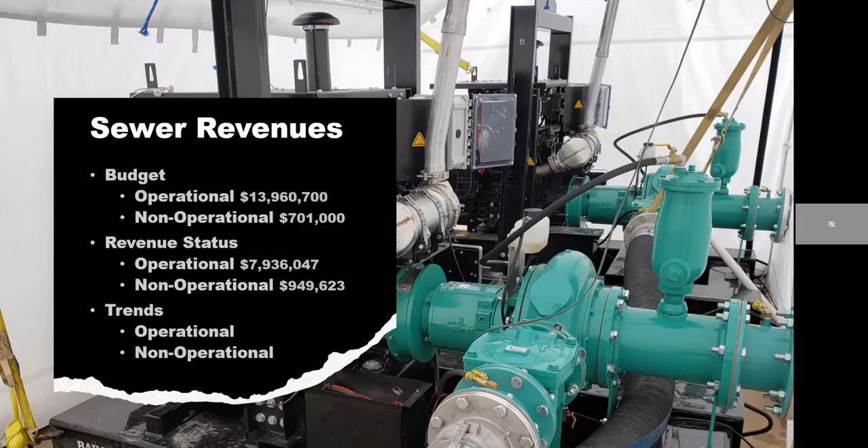And I did it again, jumped forward to sewer without discussing water's non-operational revenue. My apologies. The non-operational trends for the water side reflect that we've only spent 17% of our non-operational budget. However, many of the projects that are budgeted are already underway, meaning these funds are obligated. One area of concern for the board is the ability to maintain the expected water rehabilitation schedule, which is impactful to our overall system because getting behind could lead to costly repairs in the future due to aging infrastructure, reduced revenues, and increased expenses.

System development fees are basically used to support current and future development in Cheyenne for only growth-related cost.

Can be used for new water supply pipelines, water sources, and treatment capacity. It is a one-time charge that everybody pays once up front, and I would kind of look at it as your buy-in to the system. If you imagine all the infrastructure mentioned this morning, our stage 1 and stage 2 treatment facilities, dams, reservoirs, everything in our system that enables us to get water to Cheyenne, that is the infrastructure these fees are based upon, along with any anticipated improvements we're considering in the next 5 years. That's how we develop those fees. It's a one-time fee charged to everybody up front when they develop a piece of property, and it's basically an equitable share of growth for necessary new infrastructure that we spread amongst every user within the system.

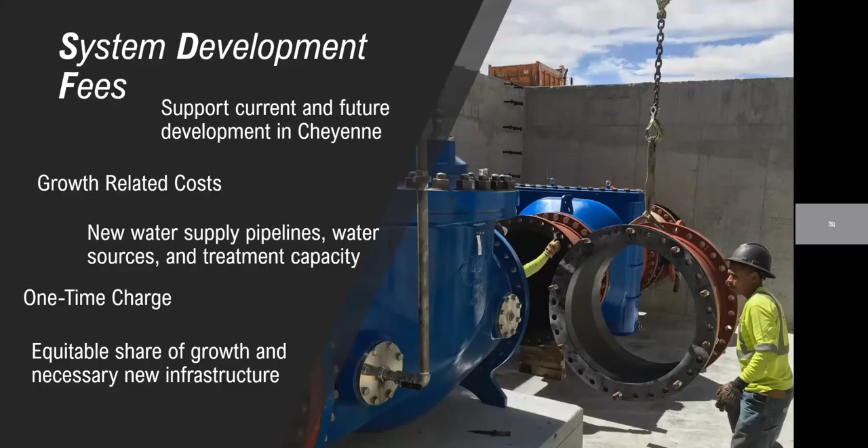Per city ordinance 4308, which is the current ordinance, or BOPU resolution number 20-20-05, you'll see it mentions this resolution approving the revised water and sewer connection fees, system development fees, pump station development fees, and related fees set by the Board of Public Utilities. It states that the board desires to set fees to secure income sufficient to pay for costs associated with water and sewer installations, recover costs and reduce debt associated with water and sewer development and expansions to the city's system, and pay for costs associated with oversizing water and sewer mains. So strictly, these system development fees are for enlargements or oversizing of our system, which will improve our system and enable us to meet the requirements of future growth.

There is also legal authority through state statute Title 15, Chapter 7, which specifically states that a one-time connection fee reasonably calculated to permit recovery of a proportionate share of the municipality's infrastructure costs necessary to treat and convey the water may be charged. So this is another area where the board is entitled per state statute to charge this fee. Those fees are typically calculated every 5 years when we do a rate analysis study, done by a professional firm that specifically does that for utilities in determining what those fee increases should be. Currently we are in the process of doing a rate study and probably going to make some changes to how we calculate some things here in the future, specifically system development fees. I'll get into that a little further in a couple more slides.

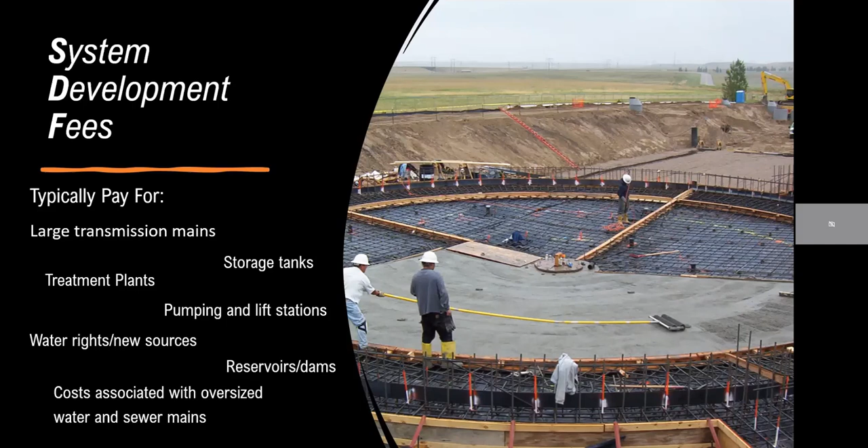Also reservoirs and dams, and costs associated with oversized water and sewer mains. Many times with developments within town, a development will come in needing a certain water or sewer pipe size, but because the Board of Public Utility knows there's going to be additional growth in that area, we will pay for upsizing - maybe a development needs an 8-inch, but we know that area ultimately needs a 12-inch in the future, so we pay for upsizing from 8 to 12. We do that through the bidding process and pay for that difference. That's what those upsizing costs are, and we can use our system development fees for those types of costs.

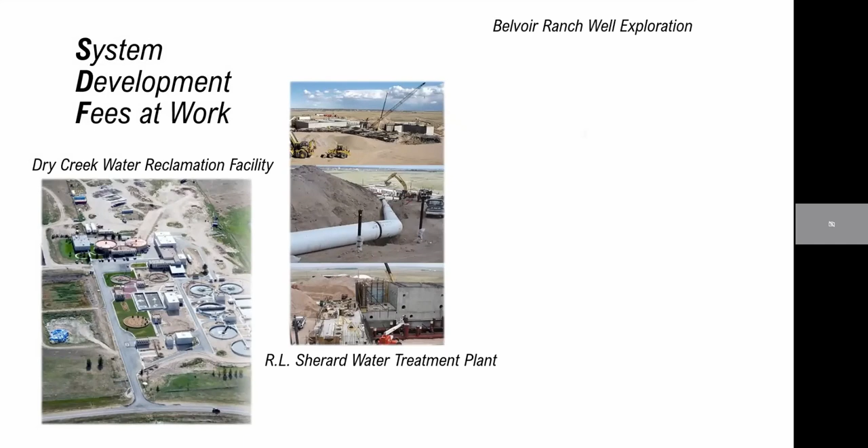Just some examples of system development fees at work, projects we've worked on in the past. The Dry Creek Water Reclamation Facility - we have two water reclamation facilities, our Crow Creek facility and our Dry Creek facility. That's a picture of our Dry Creek facility there, and we've done multiple expansions at that project site to continue to stay up with the growth of the city.

Next, you can also see the Sherard water treatment plant. It was built and completed in 2002. It's hard to believe that project is already 20 years old, but that is the state-of-the-art water treatment plant, and system development fees were used for a portion of that construction.

Also, you can see our recycled water pump station. For those of you not aware, we do have a recycled water system in town, which we call our purple pipe, as you can see in the picture. That system takes our treated wastewater effluent from our Crow Creek facility, treats it to an even higher tertiary level to provide Class A recycled water that meets DEQ requirements for the state.

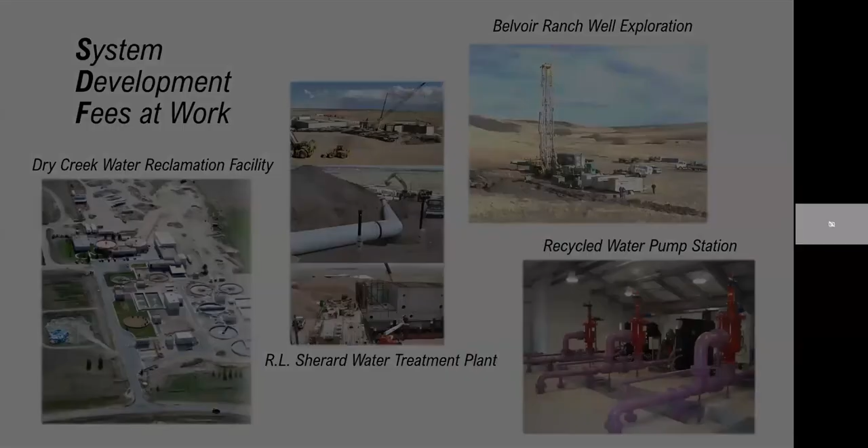One other thing before I go into system development fees - just roughly right now, so everybody knows, and these were in some of the numbers Ashley had gone over - we currently have approximately 6.9 million in system development fees on the water side and about 2.3 million on the sewer side.

I can tell you that prior to fiscal year 20, at the end of fiscal year 20, prior to depreciation, total capital assets for the water side are approximately $434 million. On the sewer side, that's about $164 million total capital assets prior to depreciation. So that tells you the dollar amount of infrastructure we have in the ground and operational.

That infrastructure is required to get our water to the city, treat it, distribute it out into the system, and collect our sewage, get it to our water reclamation plants, and get that water safely treated before it's discharged back into the creek. There's a lot of money invested in our infrastructure, so you can see that 6.9 million on the water and 2.3 million on the sewer are really a pretty minor drop in the bucket compared to the dollars we have invested in those facilities.

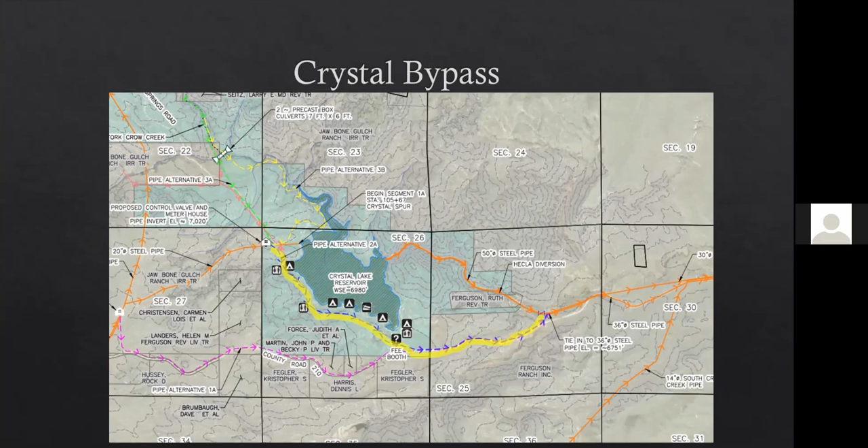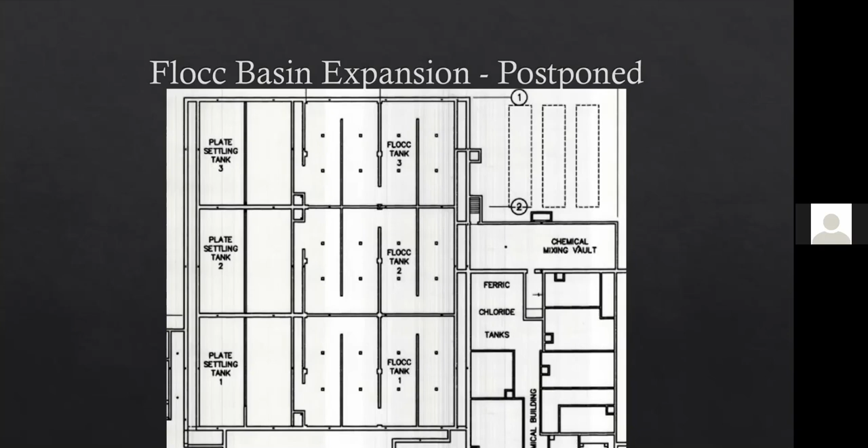One of the projects we postponed that was included in the master plan was an expansion to the flocc basins out at Sherard. Currently we have 3 flocc basins, and that's the limitation on how much water we can produce out of Sherard. Right now, with 3 flocc basins, we can produce 32 MGD. We're evaluating that, doing some analysis on how hard we can push the filters or the flocc basin. But at some point we're going to have to do an expansion to the flocc basin. But with the reduction in demands from Holly Frontier and the reduction of flows we've seen in the summer due to water conservation, this is a project we can postpone until it's needed.

But as Brad mentioned earlier, we do have a 20-year-old water treatment plant, which is hard for some of us to believe. So we've started to have to do rehabs at Sherard. These weren't necessarily all called out in the master plan, but we've had to do rehabs to the flocc basin. You can see here's a picture where we've recoated the walls and are rebuilding the paddles within there to create the flocculation needed.

Following that, we've had to start rehabbing our filters. Our filter bays, as I said, are 20 years old. We've had some issues on the under drains that you can see here that have required some maintenance, and then once again redoing the coating system on the concrete walls so that we can operate another 20 years.

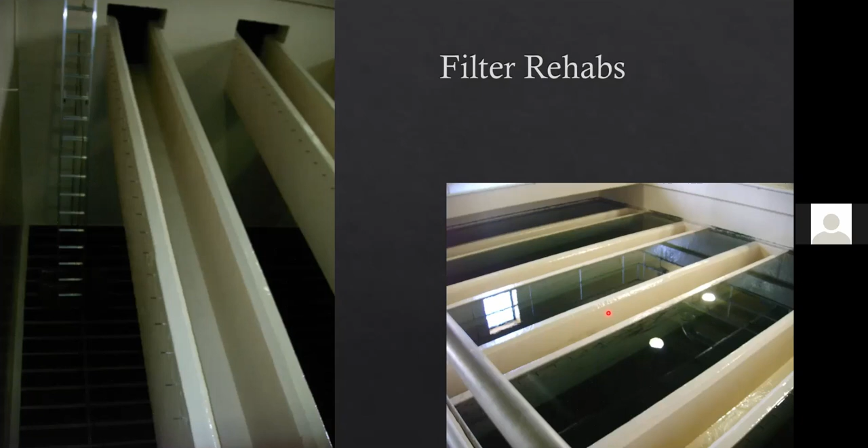One of the areas that we did have to do some reduction and postponements on is rehabs. This includes both the distribution system rehabs, the raw water system rehabs, and some of the well rehabs. This is just one area where we didn't have adequate funding to be able to do our typical goals and have had to cut back.

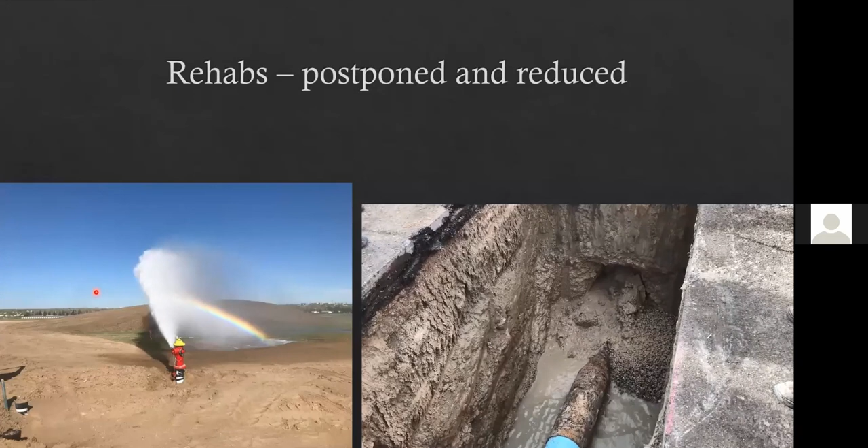Another area that we've had to postpone projects, and it's not necessarily due to cost, is in regards to our reuse system. The slide on the right shows the existing piping for our reuse system where we go up to North Park, up to the ball fields, so on and so forth. In the master plan, it was slated to get reuse water to Mylar and Smalley Park, and then up to Central McCormick area.

As part of that project, we'd have to increase the capacity of our high service pumps at Crow Creek. We've had to postpone this project simply because we no longer have the capacity. Holly Frontier, who has reduced their wastewater flow significantly, all that water went to our Crow Creek wastewater reclamation facility, and that's where we produce reuse water. With the loss of that water, we don't have an adequate supply to increase our demand on the reuse system.

So we're going to have to postpone this until two things happen. One, we have adequate flow at Crow Creek to produce the reuse water, and we have the demand for it.

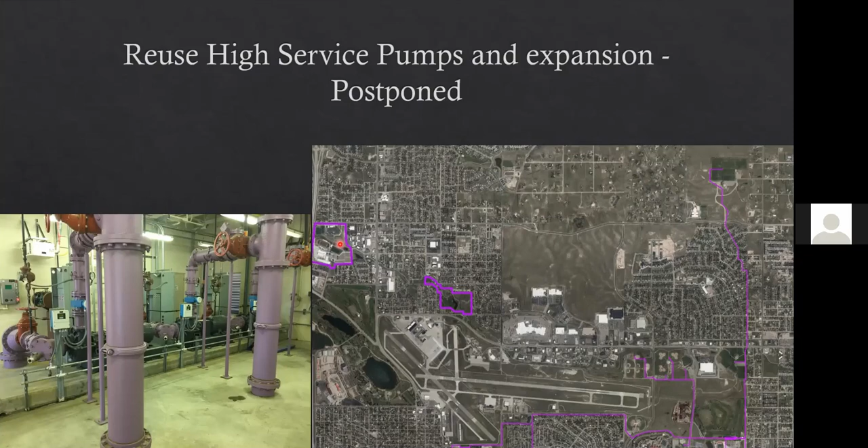A new item we've added to our list of projects is starting to set aside some money to help with future water rights. We've all talked about the drought, possible curtailment. We see that we need to do more to diversify our water right profile or portfolio so that we can address drought and curtailment in new and creative ways so that we can continue to meet the demand that our citizens and our customers put on the water system.

This project, currently out at Sherard, we do all our disinfection with chlorine gas, which has been a standard practice for many years. The issue with chlorine gas is it does have some safety issues and challenges associated with it. So we are hoping in the future, we've delayed this a little bit, to convert Sherard from chlorine gas disinfection to using sodium hypochlorite and generating that on site.

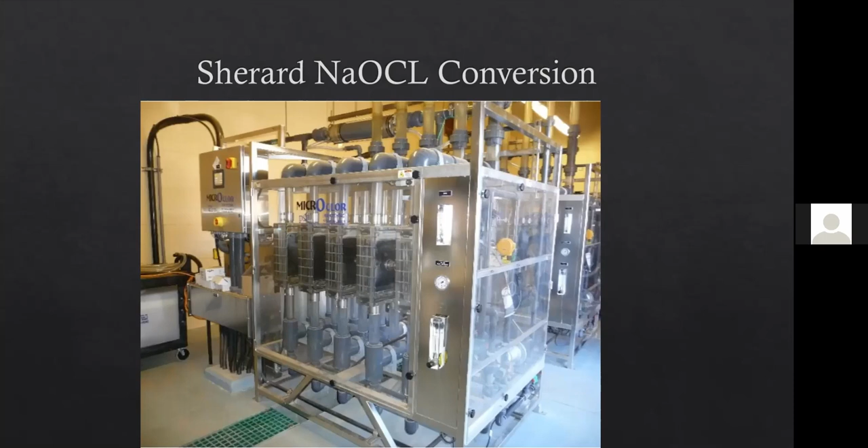So we did budget for the next coming year to do a study to see if we can convert Sherard to on-site chlorine generation, and if we can reuse the existing facilities at Swan Ranch and Round Top and move those to Sherard to minimize our costs. So there'll be more to come on this.

Another project that we have delayed that wasn't in our horizon was addressing the spillway at New North Crow. Currently, the primary spillway at New North Crow is undersized. Don't hold me on these numbers, but I believe it currently has a capacity of 200 CFS, and it needs to have a capacity of 2,000 CFS.

As part of the municipal storage project, it was identified that this does need to be replaced, but the study also identified that if we were to raise the dam at New North Crow, we could gain another 500 acre-feet of storage. That is very advantageous to be able to increase storage. So we're going to be working on that in future years, but currently we've had to delay it just to stay within our means.

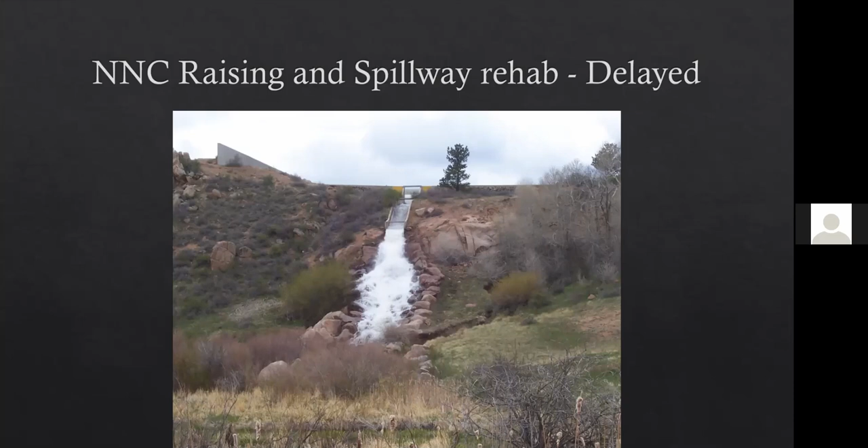Another project that's been eliminated that was identified in the master plan was to build a pipeline and booster station to allow us to get water from the federal well field, which is clear north of town, to Sherard. Currently, that well field can only flow to Round Top, and is the reason we have a chlorine generation system there at Round Top, to disinfect that water prior to it going into Round Top tank.

We were very fortunate that staff was able to identify that there was available head capacity in the federal well field and that the installation of a single valve would allow water to flow to Sherard. We have installed that valve. It has been successful. The last item that has to be addressed is...

The one downside to it is it does impact four of our existing wells. We're going to have to go in there and upsize the pumps and probably the VFD drives and motors to allow them to continue to function properly. But that's probably a cost of $160,000 as opposed to a $5 million pipeline and booster station. So this was a win for us in minimizing our costs.

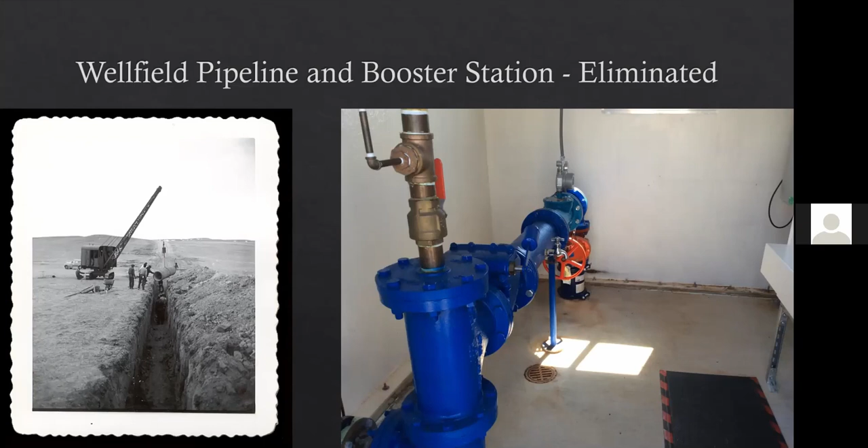Another item that we've delayed a few years is updating the master plan. We're currently trying to resolve our rate study, and with some of the workload we have now, we feel this would be more appropriate to attack in fiscal year 25. So it's one of those things we are trying to accommodate all the workload and allow us to properly handle this project.

Another area where we've been able to reduce cost because of staff efforts is at all of our facilities, we have an aging SCADA system in regards to the RTUs, the PLCs, and the radios that we use to communicate between all our facilities. Staff was able to identify a solution where we can build it ourselves using off-the-shelf components to greatly reduce the cost. We're talking in the realm of $1 million or so a year down to $250,000 a year. We'll talk about this more as part of the engineering group's presentation. That kind of summarizes some of the impacts on the water side and the projects we have reduced or eliminated.

On the wastewater side, once again, this represents all the projects we knew of, identified via the master plan or through staff identification because of problems that existed. You can see that it was a cost of $62.5 million. We did the same exercise we did on the water side, and we're able to reduce that down to $30 million. So once again, over a $30 million reduction.

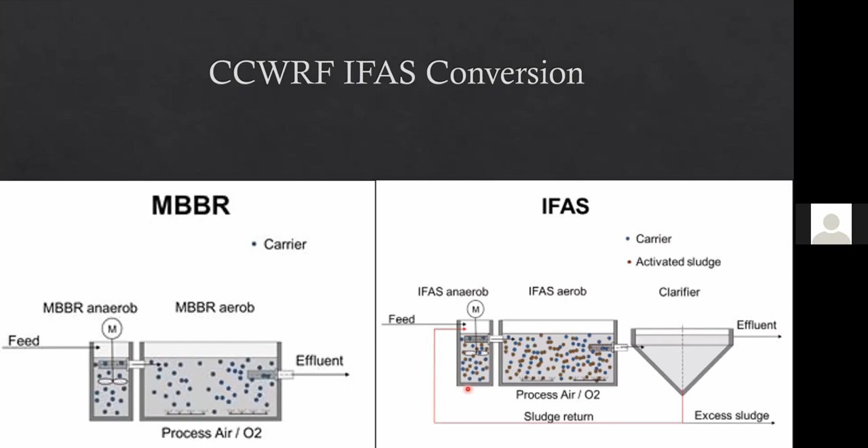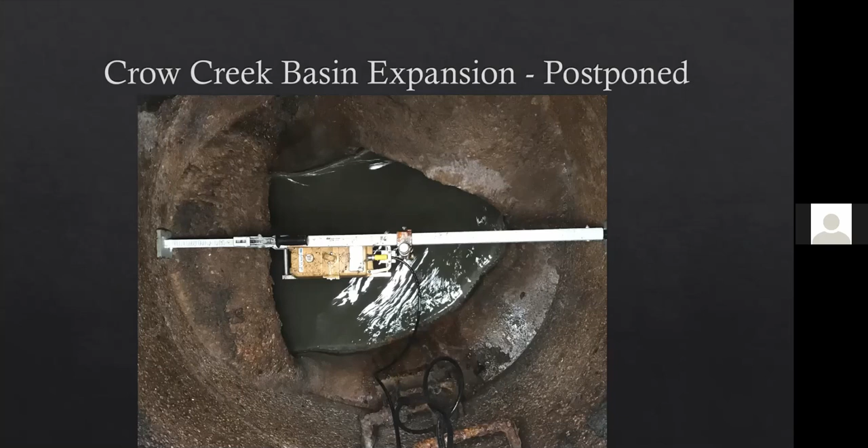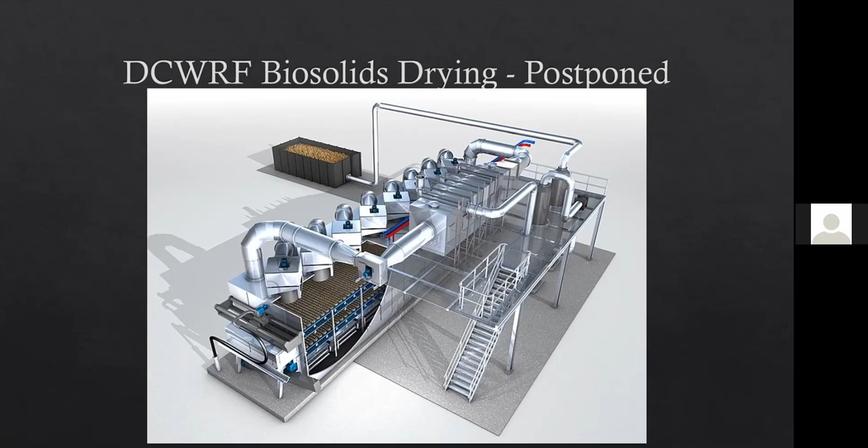Unfortunately, we did have to postpone some projects. One project we had to postpone was the Dry Creek Water Reclamation Facility biosolids drying facility. Right now, we have a project going on where we're replacing our existing centrifuges with screw presses to better dewater our sludge. This project will be needed in the future to allow us to continue to meet our Class A biosolids rating. Currently, we are allowed to do a 2-year drying cycle, which is not the norm, but there are concerns that regulations will come through that we won't be able to store biosolids on site that long, and we'll only be allowed 1 year to achieve the rating or the proper treatment. So this would allow us to get down to a single summer for biosolids treatment.

Another project still on the horizon is out at the Crow Creek Water Reclamation Facility: expanding the existing clarifiers, which I've kind of circled in green here. Currently, the existing clarifiers are not deep enough, and we have operational issues at times because of the depth and the reaction with sunlight and winter operations. So this is still on the horizon for us to do, and is needed.

I mistakenly forgot to add a questions slide at the end of this presentation. So I do believe I have one Q&A sitting out there. I haven't read it yet, but I will answer any questions anybody has.

I do have one question from Mayor Collins: would the projected new data centers be able to make up the difference from Holly Frontier, referring specifically to the recycled water program growth? Currently, no. The data centers do a good job of using water in the summertime, but most of that water evaporates away through their cooling process, so they are discharging into the Crow Creek Basin, but currently it's not enough to offset the 1 to 2 million gallons a day that Holly Frontier previously had discharged to the sewer system.

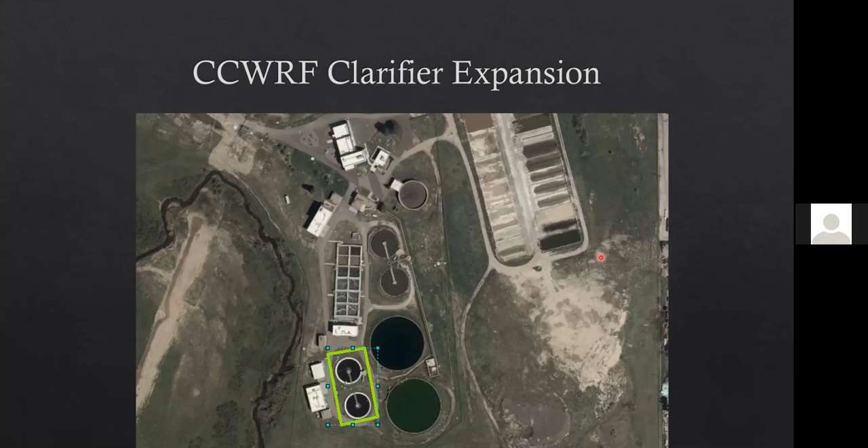Hello. We are going to take the time to have a brief update for each division, and we're starting today with administration.

Our first project and presentation will be done by Jason Land, Safety and Security, who will review our risk and resilience. Okay, sorry folks for the delay, we'll start this over, I guess we had a mic issue.

On October 23rd of 2018, America's Water Infrastructure Act was signed into law at the federal government. This law requires any utility with over 3,300 customers to develop and update their risk assessments and emergency response plans, and requires certain components of the utility system to be looked at and addressed in their assessments. To give some background, the Public Health, Security and Bioterrorism Preparedness Response Act of 2002 was the first time utilities were told at the federal level they need to create emergency response plans. This new act passed in 2018 just wants utilities to update, look at different assessments and risk, and update those ERPs. This will be on a 5-year cycle.

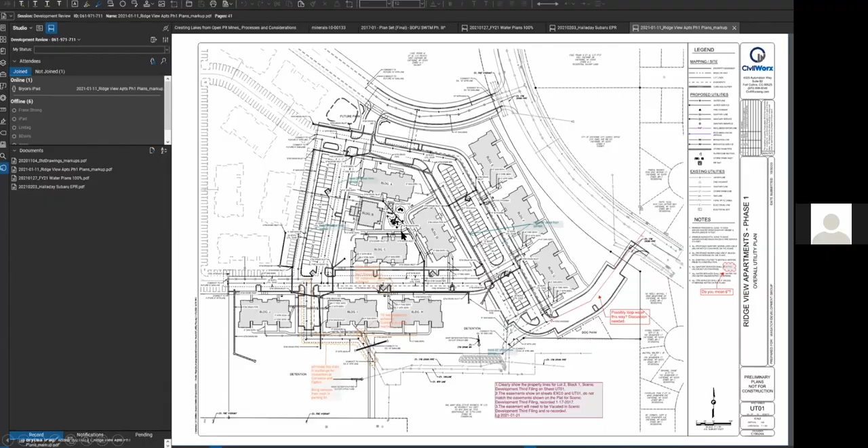In addition to that, we're meeting once a week to review these comments so that if there are contradictions or uncertainties, we're all getting on the same page before we submit the plan back to the city. The way we're doing that is by saving these files - you can see how we'd download it from review and make a comment. This is very well organized in terms of naming convention and different review numbers all in one spot. Then we take that file, and rather than writing it out in words, we just attach the PDF. It's much more streamlined on our end, on the city's end, as well as for the engineers reviewing those comments and trying to make sense of what we're asking them to do.

This would typically go to DEQ for permitting. We are currently working through a process called Delegated Authority, in which BOPU enters an agreement with DEQ, which essentially says that DEQ is giving BOPU the authority to issue construction permits for these projects. This is an effort to streamline the process. Essentially, it would go from an approved plan set to a pre-construction meeting, and then once all pre-construction issues are taken care of, BOPU would issue a permit directly, giving notice to proceed. This is something the development community has asked for many years, and it could save projects anywhere from 1 to 4 weeks. So that calls out our transition from legacy to current future process on the engineering plan review.

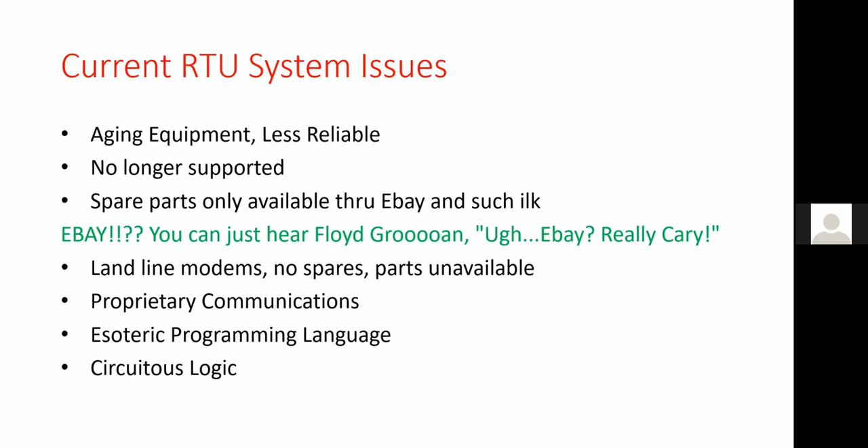But it also is a little bit hard to program. The logic is a little circuitous. We're going to come back to esoteric and circuitous here in a minute.

How do I get off that, Frank? Just take it to the left.

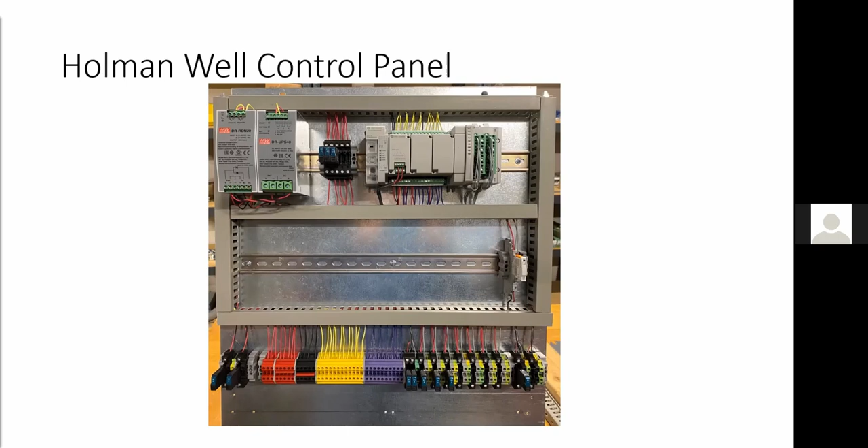So what we're looking at here, you've seen this picture before, is a panel that Dan built for us. It's a really clean looking panel. He's done a fantastic job building this first test panel. Up here on the upper right is the PLC. To the left are the power supplies. Down below are our terminal blocks. Really a great looking panel. He's doing a great job for us, and it's something that we built in-house.

So we chose to go with the PLC system that was a hybrid of both microwave radios and cellular routers, for various reasons. It's the least expensive overall system. It was non-proprietary, and we can install and program this unit in-house. It's also supported locally through CRUM.

As we've alluded to, ease of programming is key for us, and so is network security. Ironically, one of the negatives to this system is it uses PLCs. PLCs are commonplace since they're easy for us to program, but they're also easy to hack. So that's where our coordination with the IT group is going to be key.

Without the IT group helping secure this system, we would have a serious concern. But I think we're going to be able to resolve that without any big issues. The other negative to this system is that initial setup has proven to be a challenge—communication methods have to be resolved. James worked almost an entire day yesterday on the setup for the radio-based system.

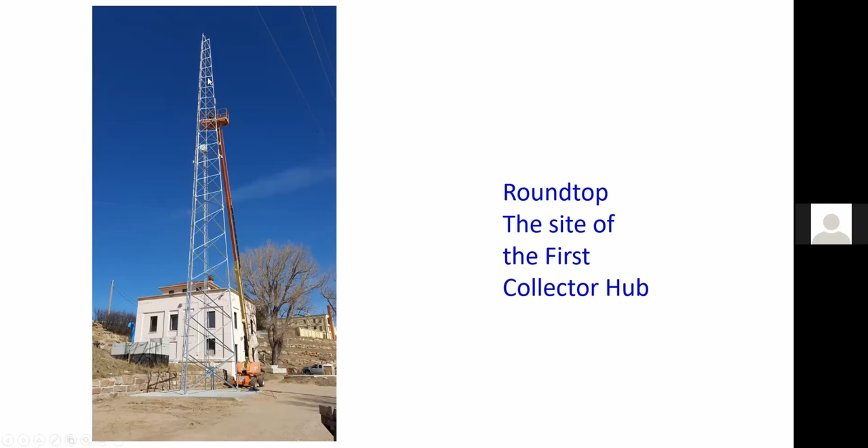So what we're looking at here is the Roundtop valve house, and we're going to make this the site of our first radio collector hub. It will talk to various wells, but it's the first of many, so this is just where we start. Yesterday, at the top of this tower, we installed the new radio system that's going to talk to Holman Well.

Other than potentially satellites. Well, satellites have an issue in that there's such latency in the communications that we can't use VPNs to talk to the normal satellite systems, and so we can't have a secure network. We haven't solved that yet, but we're hoping that with Starlink, the new satellite network that Elon Musk is deploying, we'll have reduced latency and potentially be able to use that system to communicate.

With Hog Park. Now, Lake Owen and Rob Roy, again a couple of mountain sites, still challenging, but we're hoping to use cellular at Lake Owen and potentially even at Rob Roy. We're also looking at running a fiber line up to Rob Roy through CenturyLink's network.

As we mentioned, this system is cellular based in certain sections, and there are issues between Verizon and our chosen provider working on the protocols. So that's another challenge we're working on. When we start talking about 80 some sites, it's going to take a lot of time to get these sites changed over to the new system. We're likely to use electricians to run conduits and wires, but hoping to install the vast majority in-house. Yet to be seen how that goes through the years.

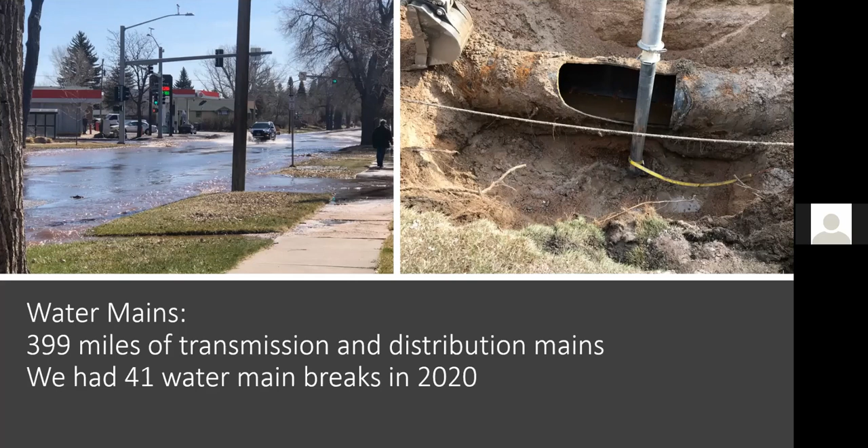This main break happened at the beginning of March, just after the COVID-19 pandemic hit. We didn't know much about this virus, but we did know there was no way to repair a 30-inch water main break and keep 6 feet of separation. Just really want to applaud the guys for all their hard work in getting that big repair done.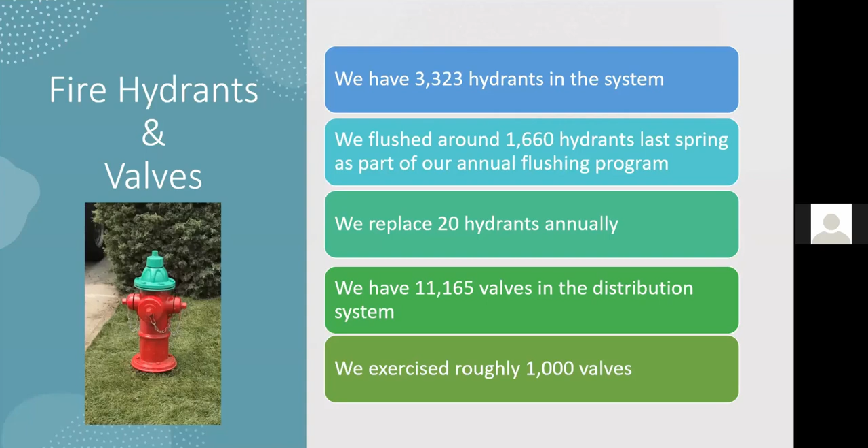Pressure reducing valves in our system are an integral part of maintaining acceptable pressures in pressure zones. Having a good maintenance program identifies any maintenance needs and helps to prevent failures.

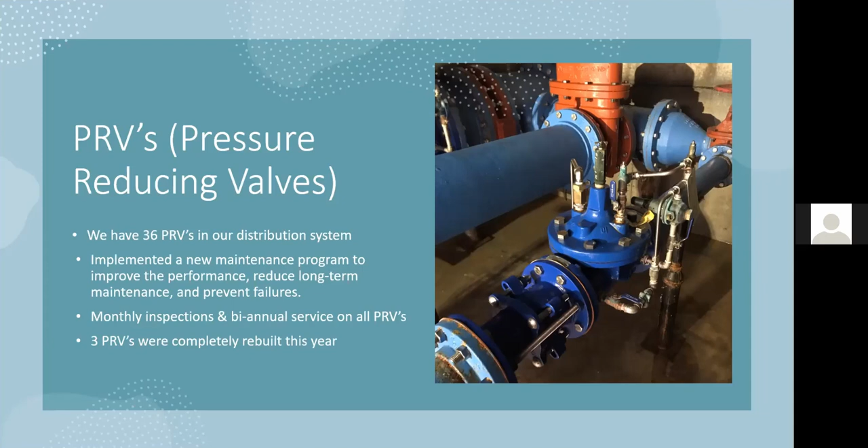Curb stops. We have 26,815 curb stops in the system. We repaired or replaced 84 curb stops and several service lines to go along with curb stop replacements.

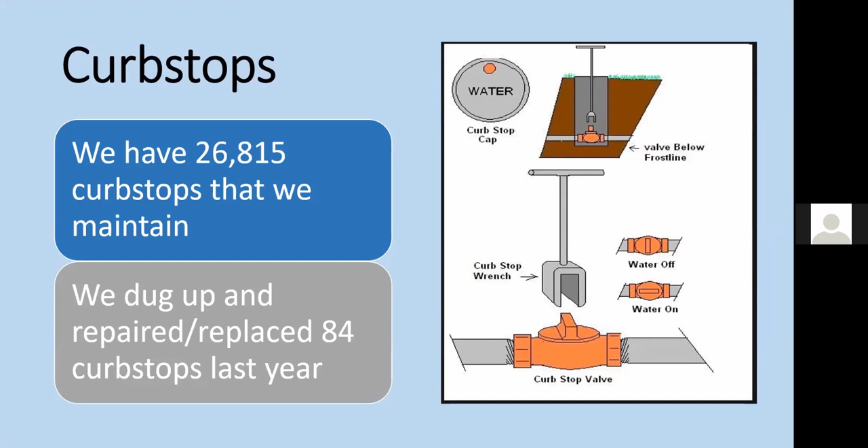Water tanks. This slide pretty much says it all. Now that the tanks have been cleaned and inspected, we have them on a 5-year cleaning cycle.

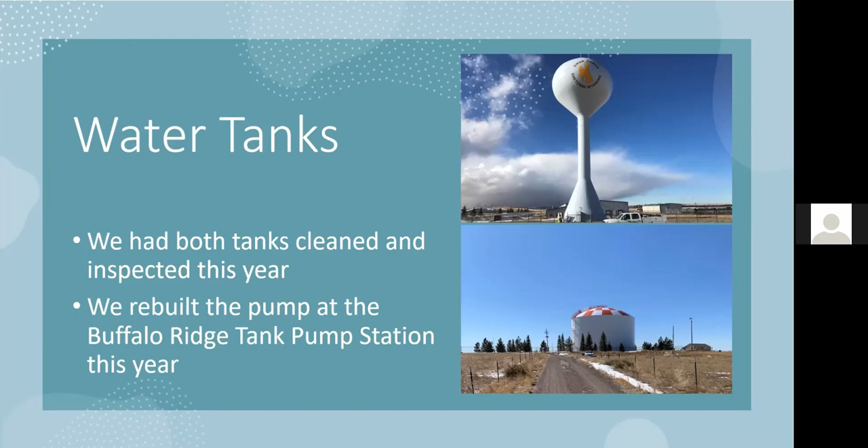Inventory for asset management. Jeff and Chris have done a great job developing this program. I can't thank them enough. They're always helpful and willing to make changes to help improve its functionality and ease of operation.

Employee development: COVID-19 really shut down everything we normally depend on for training and continuing education hours. This year we had to get creative. We relied on webinars and some in-house training to obtain enough hours to renew our licenses.

Our goals for next year are to continue focusing on inventorying all of our assets. This will help us determine maintenance and replacement cycles for everything in our system. We'd also like to develop an in-house leak detection program to help minimize water loss due to unknown leaks, and lastly, continue pursuing training and educational opportunities to keep improving ourselves and the distribution system.

That concludes my portion of this presentation. I'd like to turn it over to Dennis Graham now.

My group is the Support Services Group, and today I'd like to talk about the activities of the portion of that group that takes care of all the system's water meters. At last count, we have over 24,801 water meters in the system that we are responsible for installing, maintaining, and repairing on a regular basis.

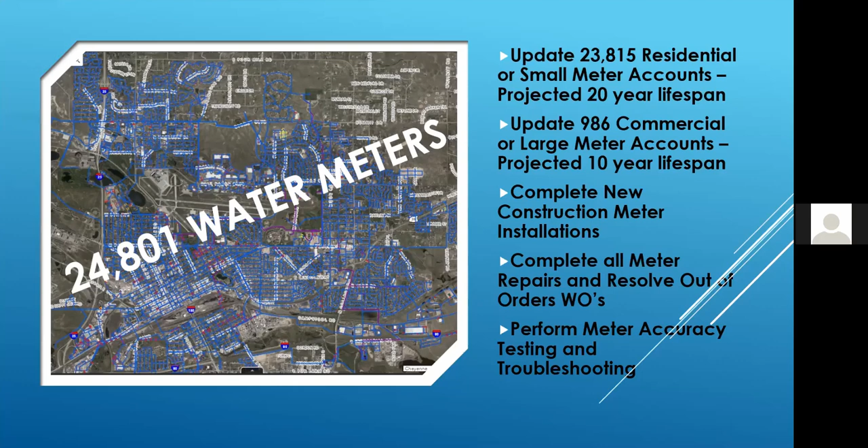We complete new construction meter installations, complete all meter repairs, resolve out of service or out of order work orders, and perform meter accuracy testing and troubleshooting.

Those meters range in size from 5/8 up to 12 inches in diameter and come in a variety of different styles. The smaller residential meters are T10 positive displacement meters. We have turbines and compound meters ranging from 1.5 inches up to 12 inch, as well as Fire Protectus compound meters, used to ensure fire flows should those be needed.

Recently I've introduced a new style of meter called a Krohne mag meter. It has no internal moving parts and is beneficial for places where we may have high total dissolved solids, such as measuring cooling tower outflows.

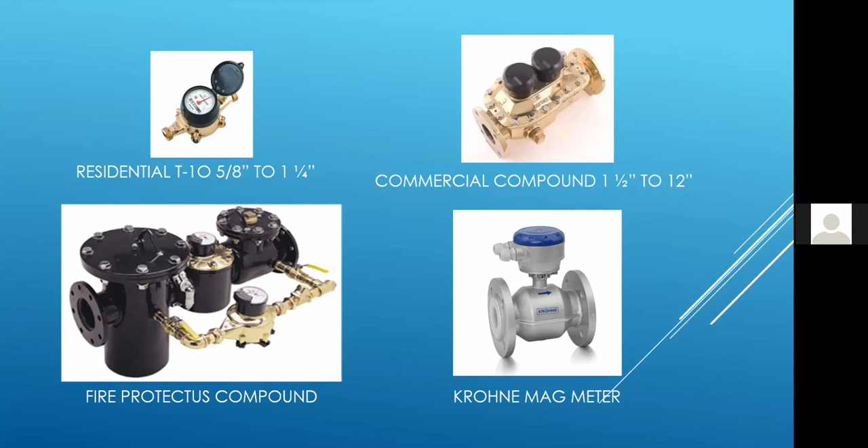To get the readings from those various meters, we've come a long way. Back when I started, about 15 years ago, we still had ARB boxes, where you'd flip up the cover and make a positive electrical connection with an Advantage meter probe. That migrated to touchpads, which used proximity digital transmission of information.

Today we are installing e-coder meters, which can buffer 90 days of information and transmit that through a radio signal, picked up with a Trimble Ranger handheld device. As Mark Mercer mentioned earlier, IT has installed 4 gateway collectors in the community, and those gateways are currently picking up over 14,000 reads on a regular basis.

The other nice thing about the software we use to read these meters is we get a lot of information. The screen I'm showing you now is something we use to monitor the performance of those meters and get notified of irregularities.

At the lower right-hand corner of the screen, you can see some minor reverse flow alarms. These alarms came more frequently than we expect, leading us to investigate the address. This happens to be a 4-plex apartment building, and when we investigated why they were having so many backflows, we realized they did not have a backflow prevention device. This led to contacting the property owner, and they're now moving toward installing backflow devices on each of their 4 buildings at that location.

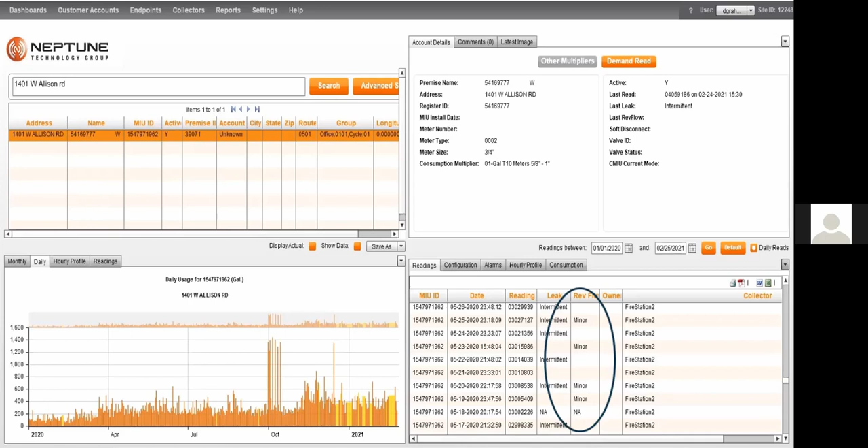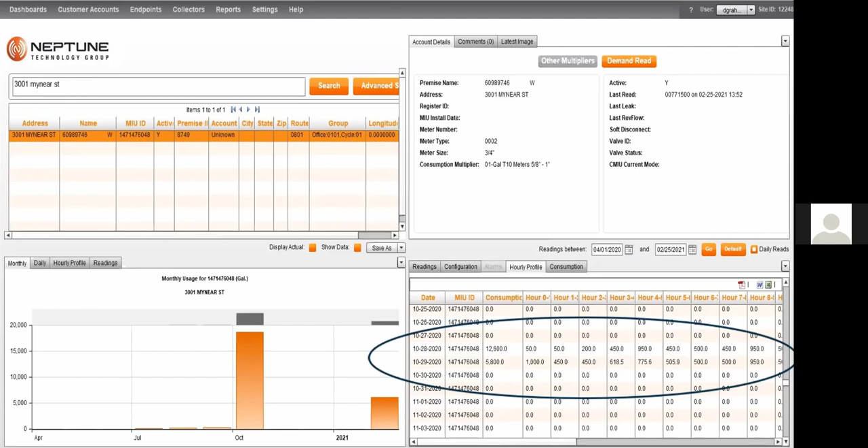The building had been winterized, but apparently they had a freeze and a break in a water line. This building was unoccupied, and by identifying the meter that was flowing, we were able to call the city and have the Parks and Rec team go out there and shut the water off. Good collaboration between all the crews to get that resolved. If this hadn't been found, who knows how long it could have run. In the day and a half that it ran, it went through about 18,000 gallons.

As I mentioned before, the 20-year lifespan on small meters comes from AWWA, it's a recommendation from them. Meters are designed to meet these lifespans, and the larger meters run 10 years. So we have to look at the meter replacement schedule to make sure our activities are aligned with that, and we don't let meters get too far out of date.

We built a spreadsheet that we can use to track that. The top line shows the year a meter was installed or last updated. The next two lines show the sizes or the count in the different sizes, either residential or commercial. And this next line shows us the year those meters need to be updated.

We at first were working to replace at least 1,000 meters a year, and we were pretty much keeping up with the schedule. But due to some of these new housing developments in town and the growth of the city, we realized that count was not going to allow us to keep up.

If you look at the graph down below, the blue bars are the number of meters that would need to be changed annually in order to keep ahead of our 20-year schedule. The orange lines represent what would be the balance of meters needing to be changed if we only did 1,000 meters. Part of the problem was the method we were doing this.

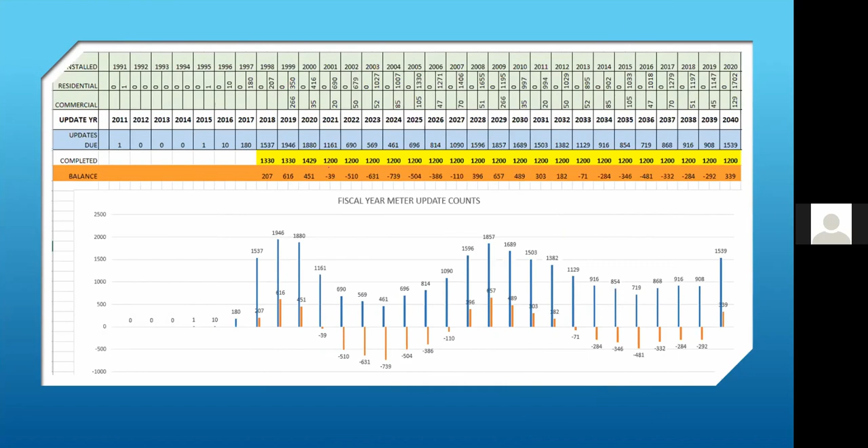Because of this, we've done a lot better. So instead of 1,000 meters a year, we've actually been able to increase that. You can see in 2018 we replaced over 1,300 meters, the same in 2019. In 2020 we installed over 1,400 meters, and this year we are on track to do even more.

Because of those changes, the graph shows we are keeping up with those changes instead of getting behind. This will allow other efficiencies—we can direct activities towards meter testing and ensuring accuracy in different ways.

So I'd like to turn this over to Chris Martinez now.

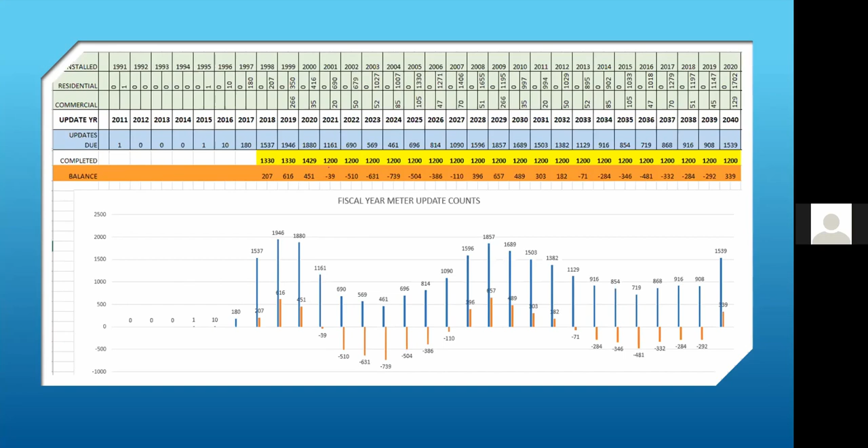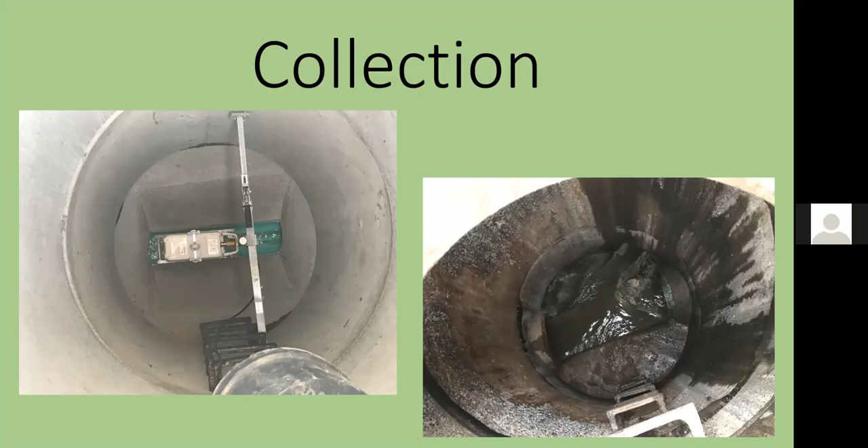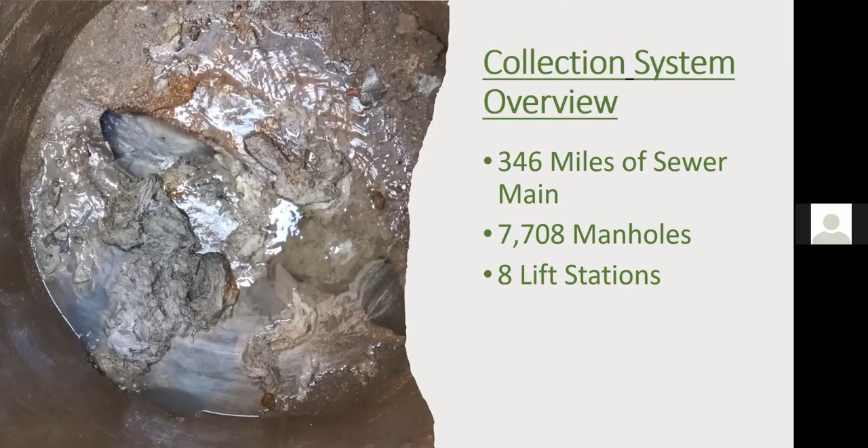Hello everybody, Chris Martinez. I'm here to give you an update on the collection system. Currently in Cheyenne, our collection system has 346 miles of sewer main, 7,708 manholes, and 8 lift stations that we have to maintain on a daily basis. Without these operators doing an amazing job daily, we would probably have more backups and more problems. So thank you guys for doing an awesome job.

As we all know, last year with COVID, due to the rules and restrictions, we had to change our ways of working. Based on the guidelines we were given, we came up with the COVID draft—we had a little fun with this. The COVID draft consists of a blind draw to create teams for a one-month time frame to keep social distancing and everybody apart from each other.

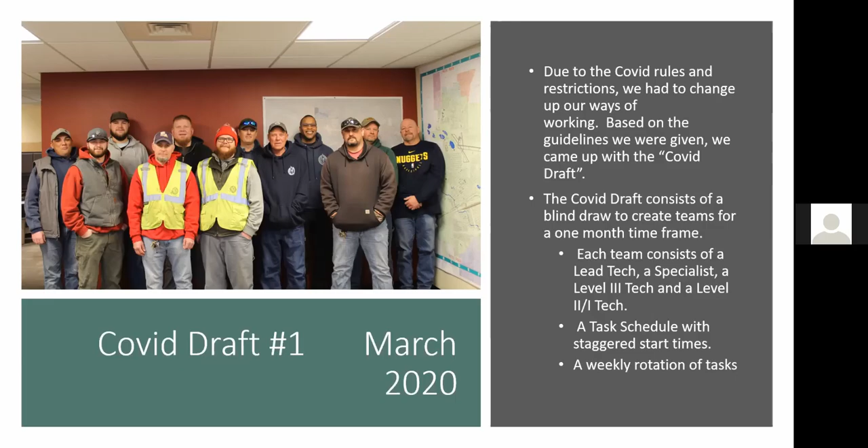Our teams, tasks, and schedules consist of a lead, a specialist, a tech 3, and a tech 2 or tech 1. Each team was an A, B, or C team, usually consisting of 4 guys, and we had 1 extra, so one team got a 5th. Our schedule was A team coming in at 6:30 to 2:30, B team from 7 to 3, and C from 7:30 to 3:30, to stagger those start times and not have everybody together at once.

Our tasks on A team are miscellaneous—that would be lift stations, videos, manhole caps, stuff like that. B team is construction, which is point repairs, manhole replacements, and those things. And C team was jetting, area cleaning, sewer calls, and stuff like that.

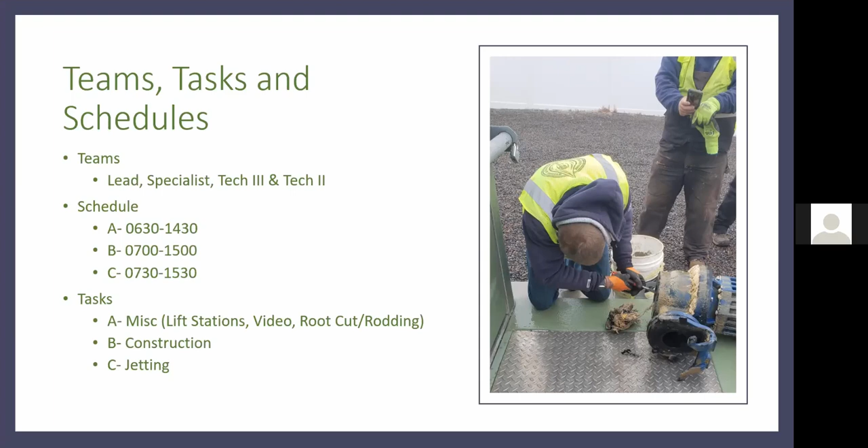Which actually worked out good for us, and we've done it for a year now. Results of this are: area cleaned 148 miles, jetted or preventive maintenance 7 miles, sewer calls 18.5 miles.

We videoed 12 miles, root cut 5 miles. We had a total of 15 blockages. 4 were found while area cleaning, 3 resulted from main breaks, 1 was a broken pipe, 3 were grease and wipes, and 4 were roots. One of the root issues resulted from roots growing from a homeowner's lateral and infiltrating our main, causing a backup.

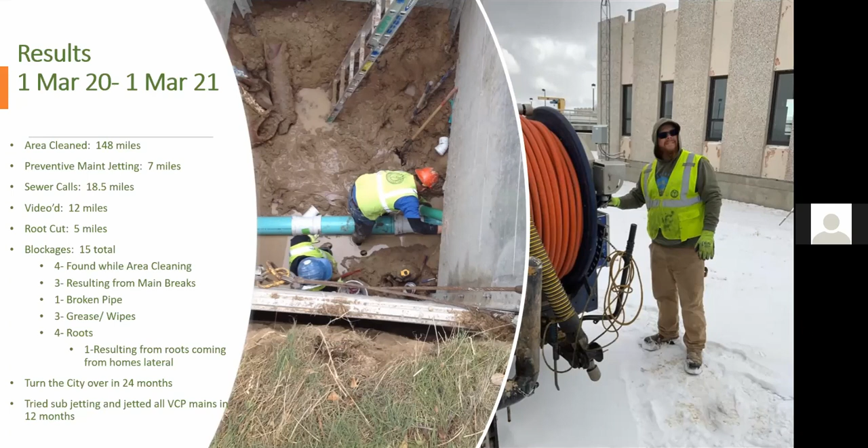We jetted all the VCP mains in 1 year, which is 148 miles of vitrified clay pipe, a little under half of the city. The guys did amazing on that. In addition, we replaced 19 manholes, excavated 30 point repairs, did numerous manhole caps and diamonds, and several internal pipe patch repairs. We continued inventorying and inspecting the systems, and of course did a couple of the Dry Creek WRF Hour projects.

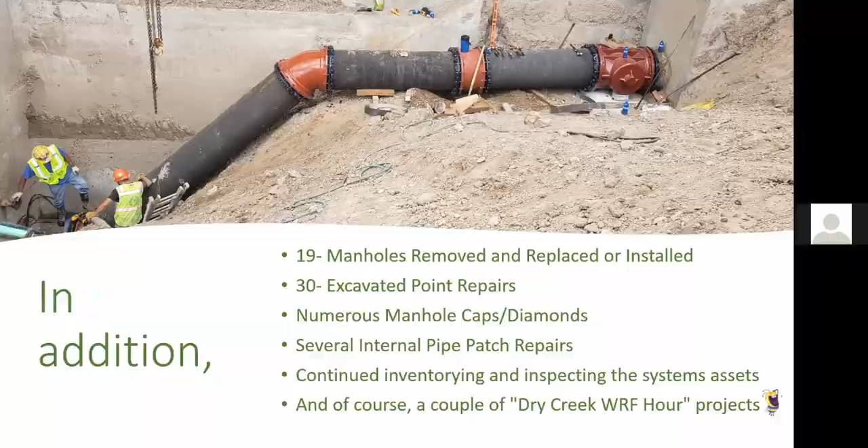The hidden positive outcomes of the whole COVID draft are: morale is up due to the frequency of the schedule change. Less experienced techs got more training and experience on equipment, lift stations, camera van, and inspection programs. Nobody got burned out.

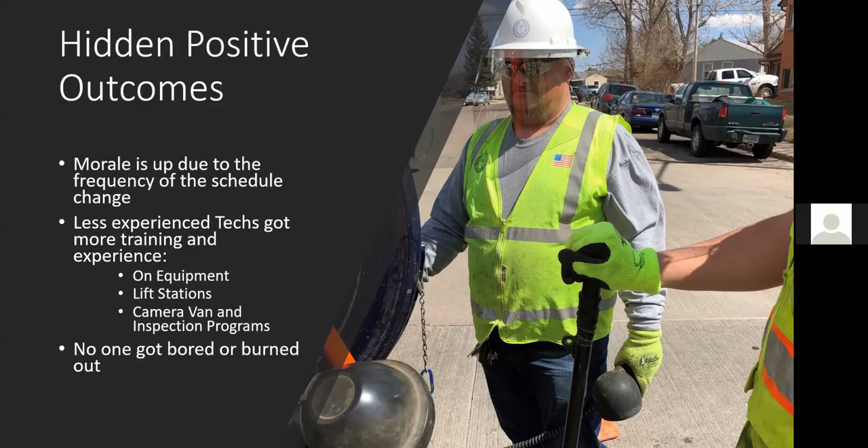Our goals we set are: continue to improve the asset management program, start a study on root abatement versus root cutting, experiment with drum cutters to cut out protruding laterals and fully open up mains, learn to train on our digital universal camera, increase our knowledge and understanding of our flow monitoring program, and continue training and educating the employees to enhance advancement.

And that does it for collection. I'll turn it back over to Doug.

Thanks, Chris. I just want to do a quick shout out and give some kudos to Chris. Harry Eberly, our supervisor for collection, had a family situation, and at the last minute Chris volunteered to step right in. So thank you, Chris, for doing that. At this time, we'll open it up for any questions anybody may have for O&M.

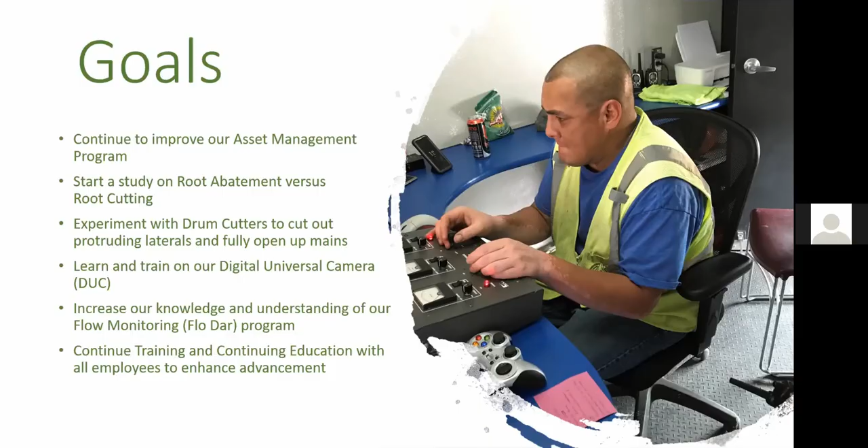I believe, as I mentioned earlier, we've got about 14 to 15,000. I'm sorry if anyone didn't see the question that was posed - it says, how many are left in the system to radio read? The gateways are picking up on 14 to 15,000, and that's based on propagation of the radio signal and weather conditions.

I know that IT is looking at installing another gateway. Don't know that a location has been identified yet, but the more this happens, the more we'll be able to pick up on these radio read meters. The ones that are left are being changed out at, starting from this year forward, at least 1,200 per year. So looks to me like that would be 4 to 5 years. We should have everything in the system radio read.

If not, we'll turn it over to the next group.

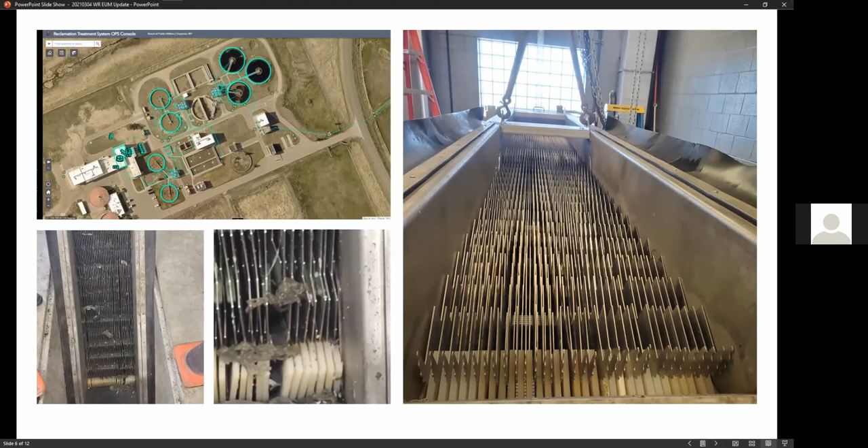Operational optimization. This was a big melting pot of all divisions, one being instrumentation. Once again, hats off to the instrumentation guys, Ray Gilmore. With the PLCs, a lot of our PLCs, what they call is noise. What that does is it affects the correction factor with meters, sensors. So Ray went in, especially with the primary digester, was able to get rid of some of that noise, fine-tune the upper and lower levels with the primary digester. That helps senior operators, junior operators know exactly what's happening if they didn't make any changes.

Another big one was Scada, the alert screen. That previous picture from the step screen at Crow Creek, we believe that was caused by clicking on a pump, switching it from lead to lag, and a huge, large debris came up through the wet well. What instrumentation was able to do was actually create alert screens that will notify operators, hey, you've turned on a pump, did you put the step screens in hand? That's not just going to save time and money, it's also going to gain knowledge again and just help everybody feel more comfortable, be a little bit more confident in the job that they do here.

Next one is laboratory.

Ever since I've been here, we've always done wet testing in-house. Here recently, in the last 3 months, Kent Loader, our lab supervisor, has reached out to a third-party contract lab where we found out that we can actually do wet testing for a little bit cheaper than what we could do in-house with wages and everything involved. This will allow Kent to do more cross-training for newer quality control analysts and share that institutional knowledge with everybody without being tied up with wet testing.

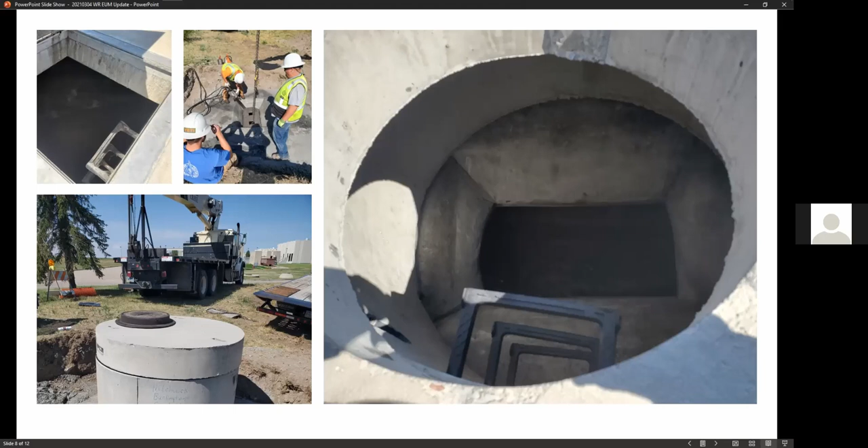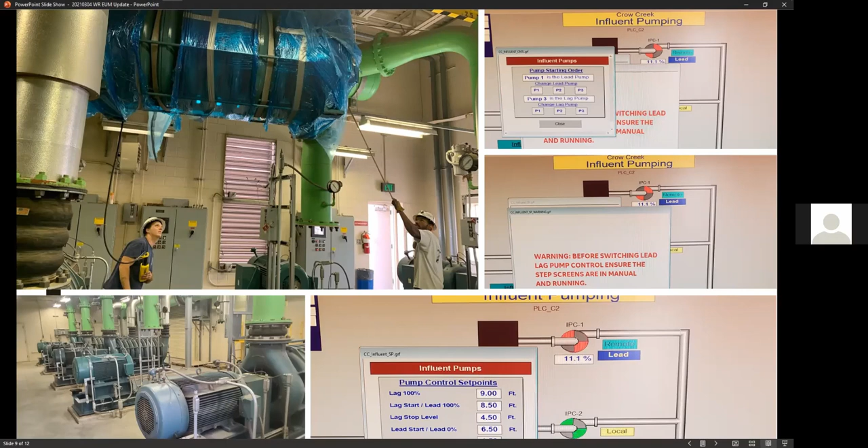Here's a picture of some blowers here at Dry Creek. This was last fall when we had 1 out of 5 blowers operating. This is blower 2 - Ryan Andrick on your left, Ryan Henderson on your right - actually placing blower number 2 in place so we can get that up and running. On the right side screen is the alert screen that Ray created. This is the IPS - if you switch an IPS pump, it gives you a whole bunch of warning screens, really making sure you're sure you want to kick that thing on before it actually kicks on. This is going to help people learn, grow, and save time and money on repair costs.

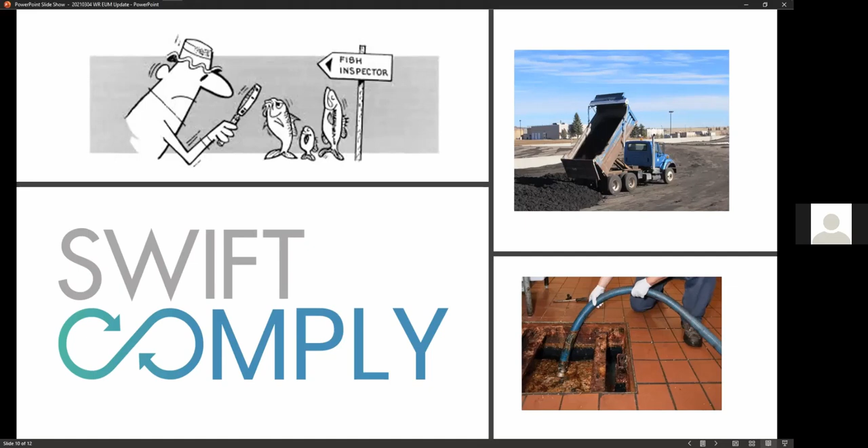Cool little cartoon that we use around here - the fish inspector, that's Mr. Kent Loader. This is for wet testing - he's looking at fathead minnows and water fleas when doing wet testing. We are outsourcing that now, but in years past that's what he's been doing. Swift Comply in the right corner is the biosolids, and the bottom right is the source control - that's the gentleman pumping out a grease interceptor at a restaurant.

So this is just the beginning. Some next moves - asset management. This is at the forefront of everything we do here, not just within O&M. We'll migrate that over to compliance, biosolids, and the laboratory as well.

File optimization - huge hat off to IT, Brian Cole, Mark Mercer, for getting SharePoint up and going. We're getting everything converted over, moving files and data to SharePoint. This will help us not only find sheets that are many years old, but finding drawings that used to take hours will now take just a few minutes.

One of our biggest goals this upcoming year, if we're allowed to with safety concerns and COVID-19, is to really get out to the public about what water reclamation is all about - what we do, what compliance is about, what source control is about, what biosolids is about. Just getting everybody informed. There's a stigma of 'you flush the toilet and it goes away.' We want to change that and make sure everybody's aware of what we do and the work that gets done out here.

Slow and steady growing pains - I can say, especially for myself, it is slow and steady. We've had a huge retirement these last couple of years. A lot of institutional knowledge went out the door at that time, but we're gaining that knowledge back and learning things that weren't known back in the day. So we're experiencing a little bit of growing pains, but as a division, as a family, we'll get through it.

Last but not least is ownership, especially with asset management and operational optimization. To Jeff and Chris's point, they're actually building the asset program for us, allowing us to do buy-in and customize it. To me, that's going to create ownership, and it'll benefit not just the division but the Board of Public Utilities as a whole for the future. It won't just be reactive maintenance or a reactive issue or emergency - it'll be a proactive response, which will benefit all organizations involved.

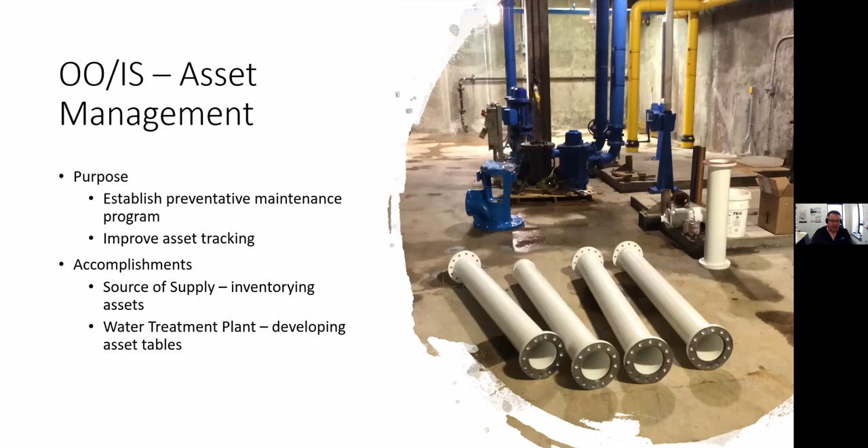One of the areas we've had some challenges this year is asset management and maintaining our equipment, shown here in this picture. These are our house pumps, which provide pressurized water to our facility and help us apply and add the chemicals we need to treat water. The picture here shows staff staging to replace one of those house pumps. As mentioned in other presentations today with engineering, our facility is now 20 years old, and we're starting to see equipment like the house pumps begin to fail. We do have good news, though.

We are starting construction on our hydroelectric generation facility this year. This will help us be more energy independent. It will also help us avoid some of the challenges our neighbors to the south experienced this year during those recent snowstorms. There are some additional things we're doing as part of our operational optimization.

As part of this, we are improving the ways we track electrical use. We're also changing over our lighting to LED lighting to reduce demand and improve the amount of energy we can sell back to the grid or utilize within our facility.

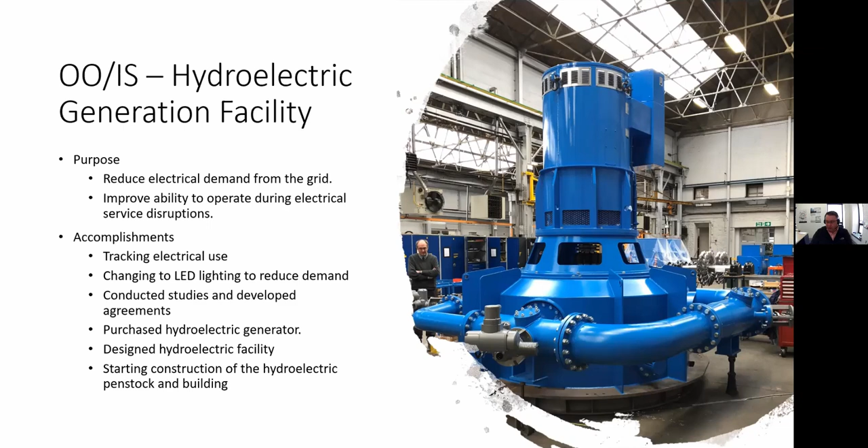We have had opportunities over this past year to replace positions, and when we do, we evaluate whether we can improve efficiencies. One approach is looking at opportunities for cross-training, trying to combine people with similar skills and combine efforts. To that effect, we have combined our source of supply and wells into one group. We've also combined Matt's team, water reclamation, and our team here in the laboratories into one group, and we are currently sharing an administrative assistant as well.

One of our big accomplishments this year is that we have worked to change our surface water groundwater blend. Since the mid-1990s, we have done a 75% surface water to 25% groundwater blend. That was done so that we added minerals and naturally adjusted our pH so the water was less likely to be corrosive in people's homes, and less likely to dissolve lead and copper from pipes. Since we constructed our treatment plant in 2002, we've added the ability to do some additional pH adjustment, so we no longer need that 75-25 blend.

So we conducted a study to see what we could accomplish while maintaining and protecting water quality for our customers. We have worked with EPA to accomplish that, and we are currently doing an 80-20 blend. If everything continues like we anticipate, and the study indicates it will, we'll be able to further reduce that next year to an 85-15 blend.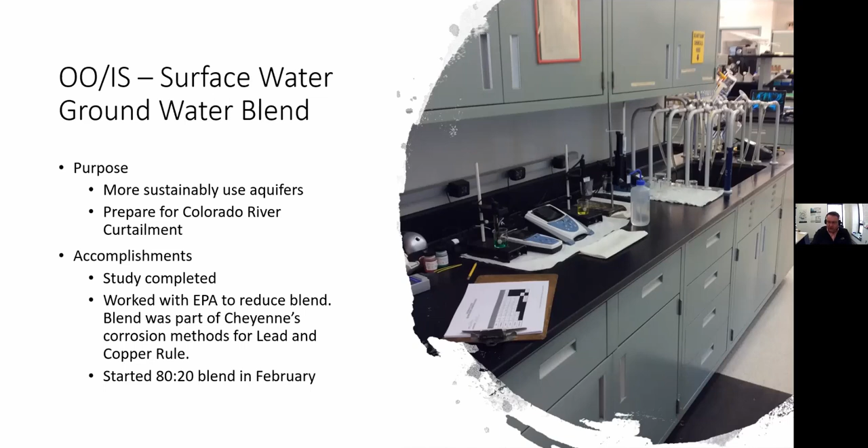As Frank indicated, we are looking at switching to a hypochlorite disinfection process out of the water treatment plant. The purpose behind that is that hypochlorite is much safer for our staff than chlorine gas. It also reduces the amount of pH adjustment that we would need in our water. Hypochlorite lowers the pH less than chlorine, so we would also need less sodium carbonate to better balance our pH.

We have gone out and obtained some cost estimates on what we think it would take to install a hypochlorite system. But in evaluating those cost estimates, we think we can repurpose some equipment at the plant and dramatically reduce those costs. So in this upcoming year, we're going to be working with an engineering team to design a hypochlorite system, incorporating some of the facilities that we already have.

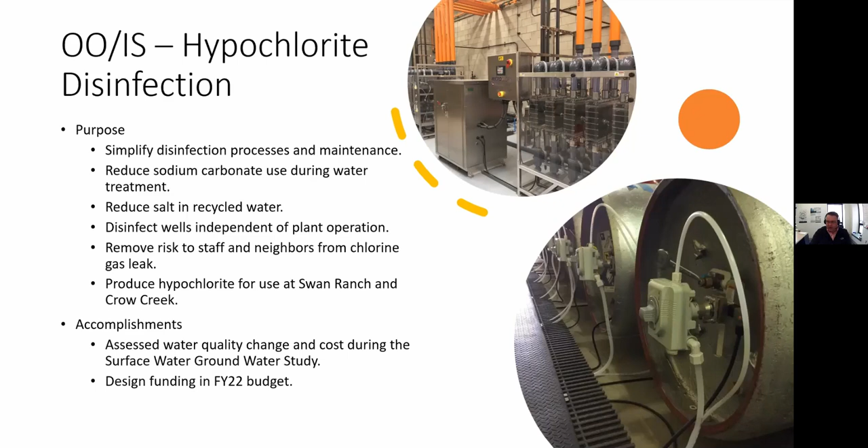As was also indicated by Frank earlier, we have been looking at potentially increasing our treatment plant capacity by re-rating our filters. So we've been looking at that through the past year as well.

We do want to understand our aquifers better. We want to know how we can sustainably use our aquifers, how we can improve groundwater recharge. We need to identify some future locations for additional wells, and possibly even look at using aquifer storage and recovery in the future. So to do this, we have conducted several studies.

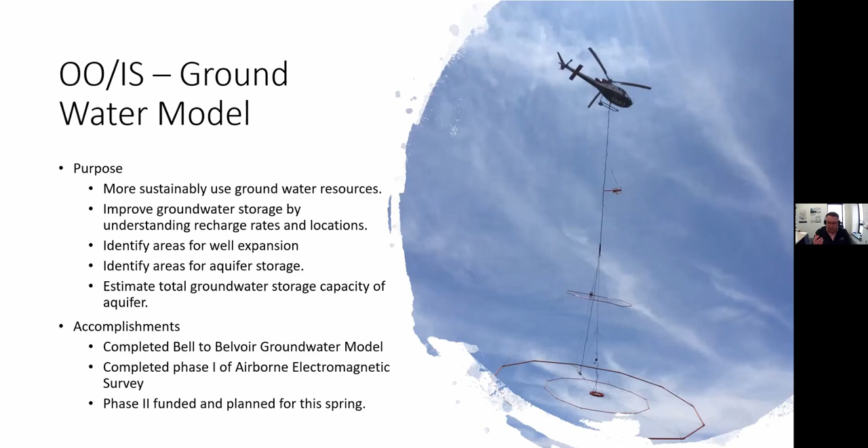We want to combine all of these studies together into a unified groundwater model. From this model, we hope to be able to identify where recharges occur in our aquifers and possibly even come up with some ways to enhance that aquifer recharge. A possible example might be installing snow fences above areas where the groundwater recharges, so we capture snow and improve the amount of water we're getting underground.

Another area we've been focused on this past year is our Pond 3. Pond 3 is the area where we store and separate the solids and material that we remove from our water to make the water safe to drink. Over time, this pond fills with sediment, and it costs about $500,000 every 3 years to remove those solids from that pond.

We're testing utilizing some textile bags to remove more of the water and dry those solids, making it easier to transport them to neighboring ranches, and possibly even utilize those solids with our biosolids as part of our biosolids program. We think that we can accomplish that and reduce our costs from $500,000 every 3 years to maybe around $70,000 a year.

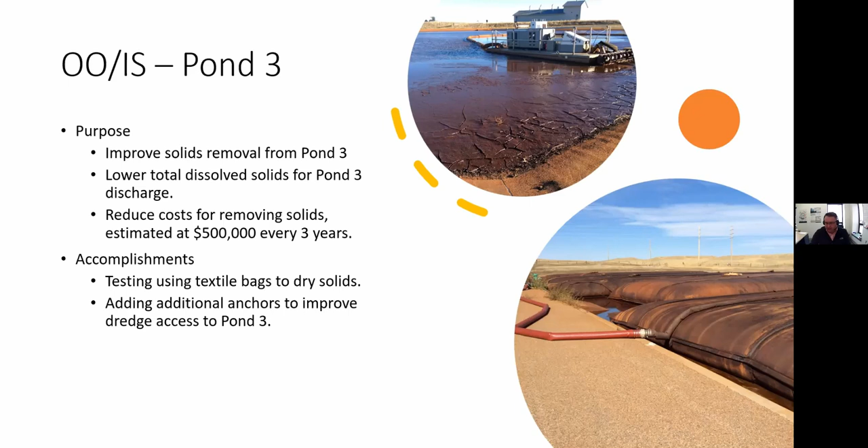As far as some of our staffing, we have been adding, as part of our annual review processes, reviewing our standard operating procedures. Our staff have been pretty good at identifying some small ways that we can improve operations with that, and to improve our processes.

Since I know we're getting very close to the end of the day, I want to give one shout out for one of the methods that we've improved on our training. One of the big challenges we have had this past year is training our staff. 3/4 of our staff work nights and weekends, so it becomes a challenge to get training done with those guys.

For them to come in and train during normal office hours or any shift that's outside of their normal shift, it kind of interferes with the time that they have to rest before returning to work. So we have been looking at ways to do training using the technologies that we're using today, such as using video and modern communications methods.

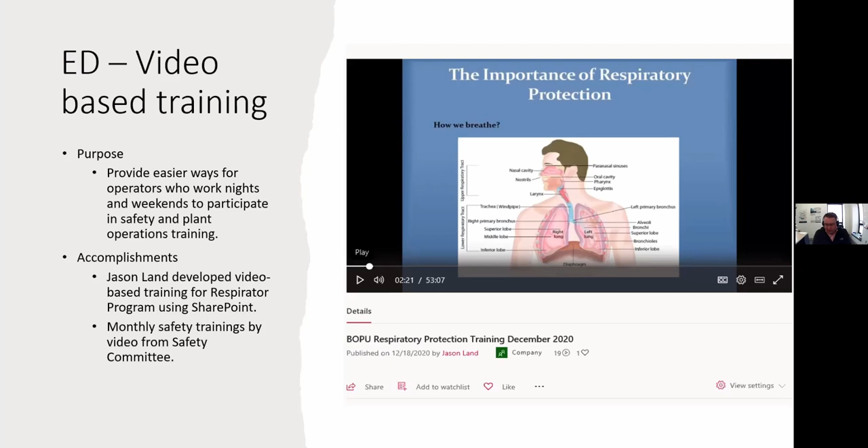A recent example was some training conducted by Jason Land, who updated our respiratory training by creating a video that the operators could participate in and pass questions on as part of their normal shifts. That was very well received by our operators, and they appreciated that effort. So with that, I will go ahead and turn over the end of my presentation and thank everybody for participating.

Okay, thank you, Clint. Don't know if anybody still has any questions for Clint. If you do, I can try to answer them. Again, great job, everybody. We're right on time. I showed 12 o'clock pretty much exactly.

So I just want to tell again, staff, thank you. As you can see, we have a fabulous group of people working here at the board. Great job by everybody today. I think another thing that's really important is that most of the people who work here are very highly skilled and trained in what they do. They have their specialty areas. And if it wasn't for the team effort of everybody, what we take for granted here in the city for our water sewer services just wouldn't happen.

I think one thing we take for granted is we turn that water faucet on every day to get a drink of water or to shower or bathe, and we expect clean water to come out of the tap. And the same thing we expect if we flush that toilet or open up a faucet and those flows go down the drain, we expect that to happen. We just expect that. And I think hopefully you can see by today, there is a lot that goes on behind the scenes, a lot of highly trained, skilled individuals that operate and maintain this system. But yet there's also all the financial obligations and criteria that we follow just to make sure that we have the appropriate funds available to continue operation at a high level.